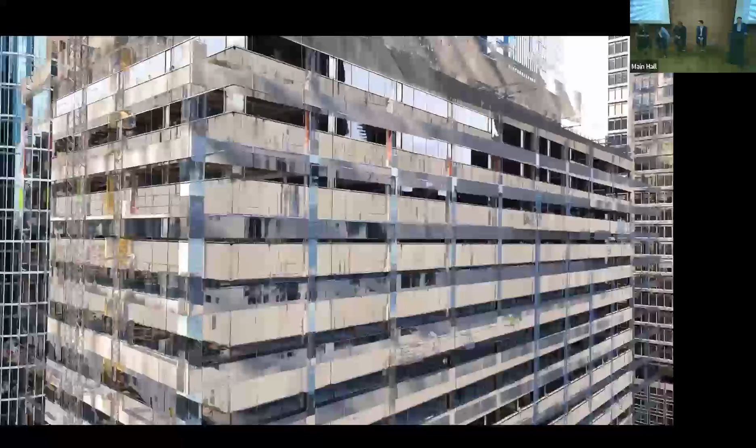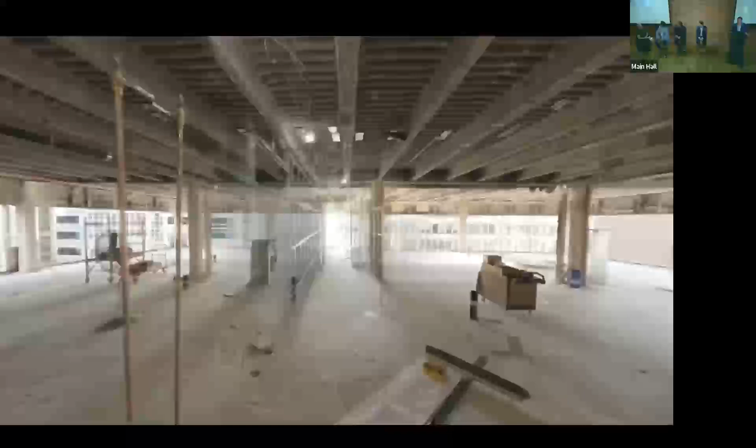So these are all views. Here we are in the lobby. Up on typical floors as it's getting framed out and drywalled through the course of construction.

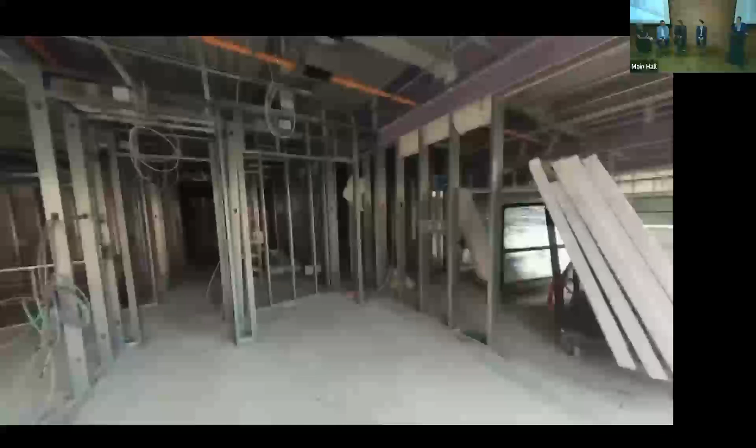There was some audio with this, I don't know what happened to it before. Yeah, the audio's not working. There was music behind this. It's not as good without the audio, but all right.

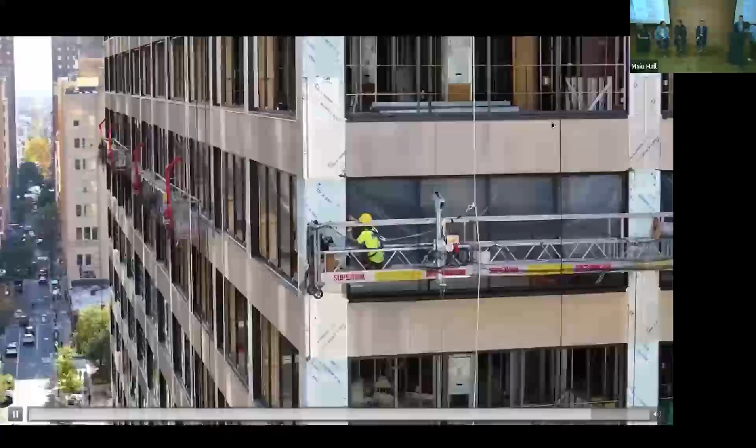Shout out to Elevated Angles who produced that content. They do a lot of great work for us from a drone footage and time lapse capture standpoint, so they deserve some credit there. Elevated Angles.

So going through the contents, we want to take you through this presentation in 4 separate parts, and we wanted to be holistic about how we approach it.

So we're going to first talk— I'm getting an echo. Closer to the mic. Is that better?

Okay, so we want to take you through the building in 4 parts. We're going to start with the building history and context. Then we're going to talk about the exterior evolution of the building over the last 68 years, and then get into the planning and design, including interior design, MEP systems, and certain decisions made with the floor plans and unit layouts.

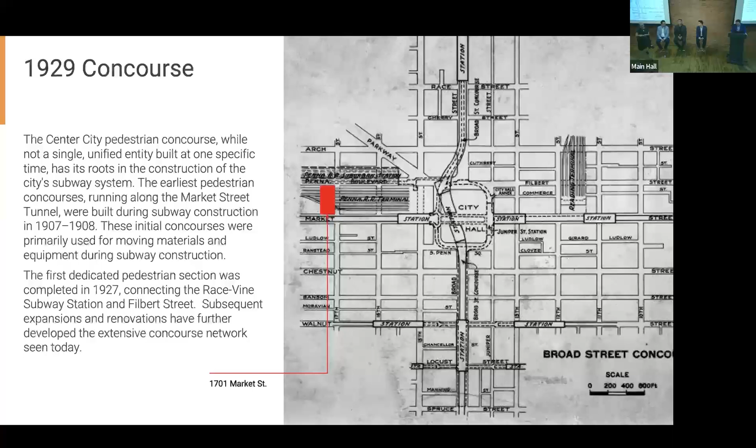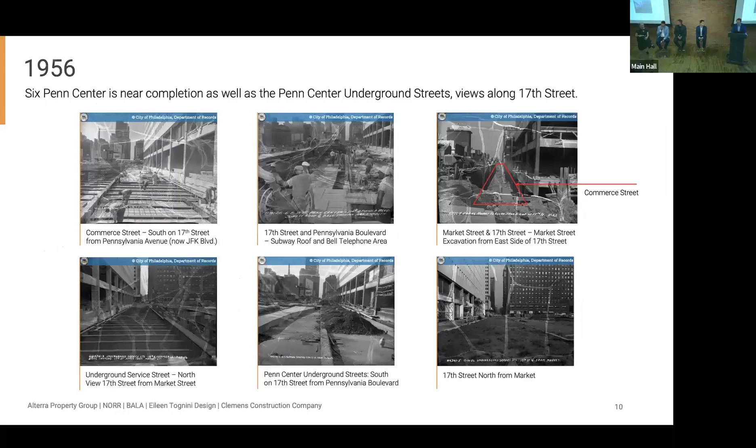Fast forward to 1956, this is Six Penn Center nearing completion, as well as the underground street that's part of Penn Center. So what you see in the upper right image is Commerce Street, which has a major advantage to this project. It basically has an entry point on 19th Street, goes underground, under 18th Street, and then under Market, where it eventually dead ends at 16th Street.

There's a loading dock under 17th that became critical for construction operations. And maybe you could touch a little bit on that, Brett, on how advantageous it was to have that loading dock there, which is owned by the city but has been great from a staging point of view, loading and unloading.

Thank you. Yes, any project Center City, you've got your logistics challenges, and it is very convenient that we had a loading dock right there off the concourse. It was a shared loading dock, so we had some challenges with that, but it was very helpful in the execution of the work. Unfortunately, that loading dock only led to one small freight elevator, so at the end of the day it wasn't enough. We had to put a man and material hoist on JFK in order to supplement that for getting the job done on time.

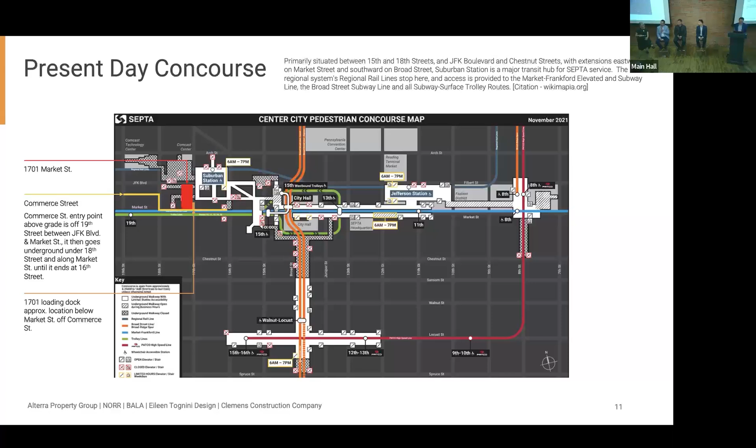This is just a diagram showing Commerce Street. I think maybe you could talk a little bit, Mark, about now that we have about 25 tenants in the building, how advantageous this has been for move-ins and move-outs. My understanding is this is what they're using, right?

Yeah, no, that's exactly right. And I'll be first to tell you, I didn't even know that street existed before the project started. Seriously, do yourself a favor and go down 19th Street at one point in time, and you'll see off to the left-hand side there's Commerce Street, and sure enough, it goes down. And I've worked in Philadelphia my entire career, and I never knew this street existed prior to this project.

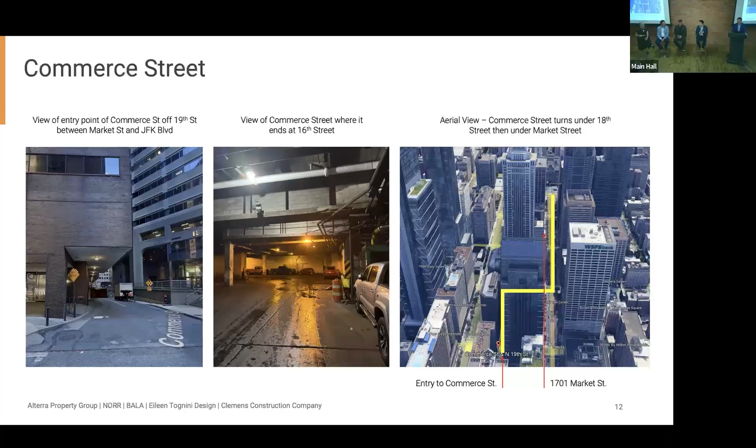But what that really allows, guys, is a very seamless transit and move-in process from property management and lease up. You don't even know tenants are moving in because they're not in front of the building, not obscuring any of the building elevations or main entry points. So it's really been a great amenity, an embedded amenity to the building.

Here's a photo I found in the Department of Records, which is pretty neat, that shows in red Commerce Street under construction, and to the right is 1701 Market. This is around 1956. It would open up a year later.

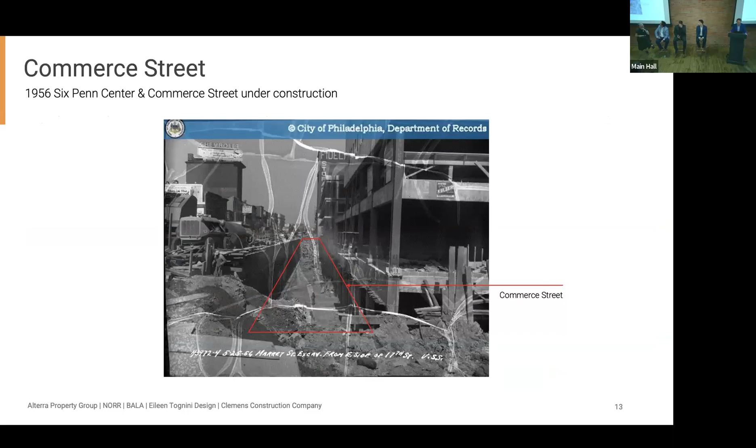To the south is Commerce Street. In the bottom right-hand corner, we have the loading dock under 17th Street. And then we have a pedestrian concourse in Suburban Station that basically cuts right through the building.

Between the pedestrian concourse and Commerce Street is our Concourse 2, C2 level, where we have several amenities and MEP rooms. It's quite a nice space with very high ceilings, which allowed us to do things like a basketball half court and a pickleball court. We have plenty of ceiling height.

And then to the north of the pedestrian concourse is what would be retail space. Where the corner bakery is, that would be exclusively for use of the tenant. And I think in conversations with tenants, potential tenants, that's probably been an asset.

Right now, leading off of C2 is actually the temporary construction office, which is probably one of the nicer construction offices you guys had. Meaning they're not occupying a unit or apartment, which typically takes place where they don't have a detached trailer on the sidewalk necessitating a long sidewalk closure permit. So it is very unique.

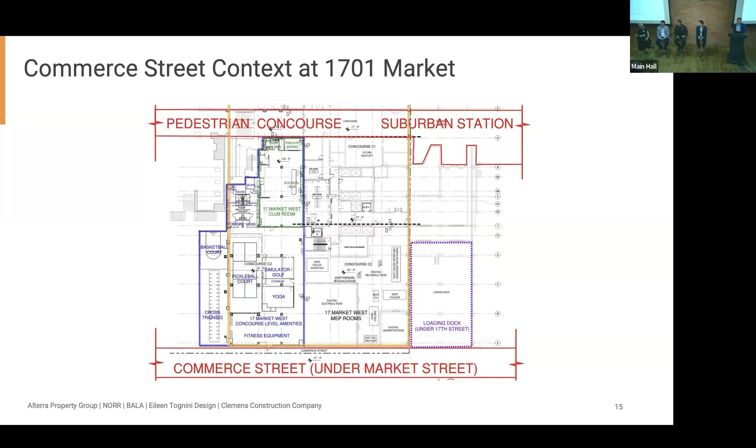So I think next, the thing that's most noticeable to everybody as you walk past the building is the exterior evolution, and everybody remembers what it looked like before and what it looks like now. There are a lot of advantages to replacing the windows. It was both a practical and key feature in attracting tenants.

Mark and his team did a lot of research on this, particularly attracting tenants, and the operability of the windows being paramount for well-being and tenant comfort, bringing fresh air into every room. So maybe you could touch on that, Mark, why full height windows were so important and having that operability.

For this building to be competitive with new product being introduced in the marketplace, it was paramount that we have floor to ceiling height windows. When we were walking through the space, it was originally ribbon windows, and there just wasn't enough natural light or access to natural light and air.

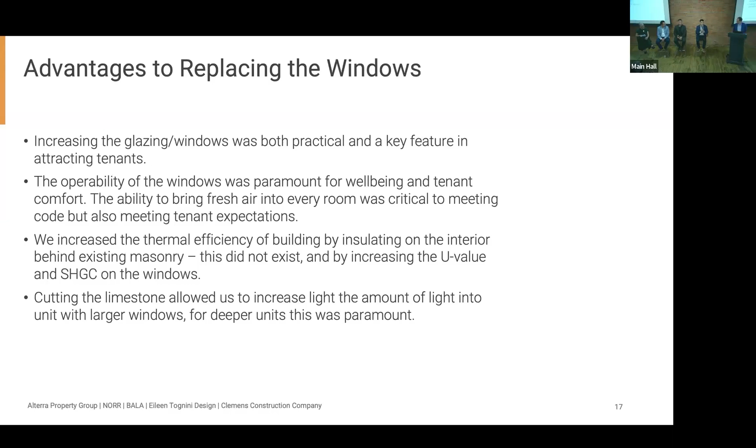Interestingly, on the 18th floor, which was the boardroom level of Morgan Lewis, they had actually cut down the windowsill height at one point in time further before they introduced the ribbon height. That kind of compelled and inspired us to take it one step further and cut it down as low as possible to the existing deck elevation to achieve a rough opening that would accommodate floor to ceiling height windows.

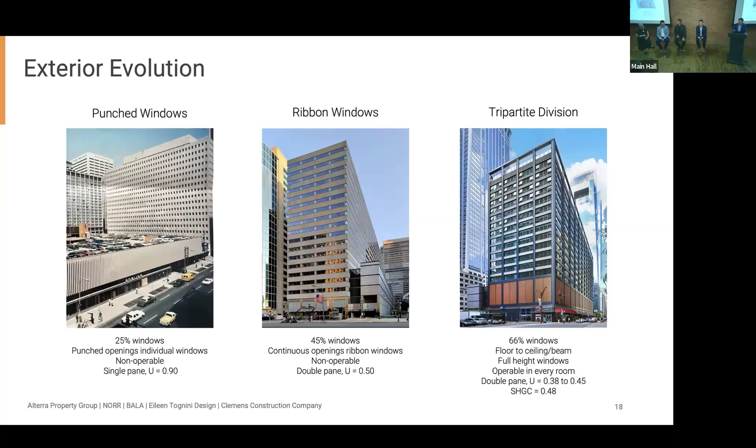One of the things we used early on to proportion the building aesthetically was a tripartite approach, a very traditional way to design an element or a whole building. The building had a very horizontal expression with the ribbon windows, but in conversations with Mark and his team, we wanted a more vertical expression. Beyond that, we wanted a simple proportioning device to give the building a distinct base, middle, and top, to speak to the different functional programs of the building.

At the bottom we have retail, above that the parking garage levels, and then a series of units from the 6th floor to the 18th floor. At the top we created what we call the sky frame. I'll get more into the details on that, but this approach of accenting the verticality of the building, since it's a high rise, and doing the tripartite design really improved the look of the building.

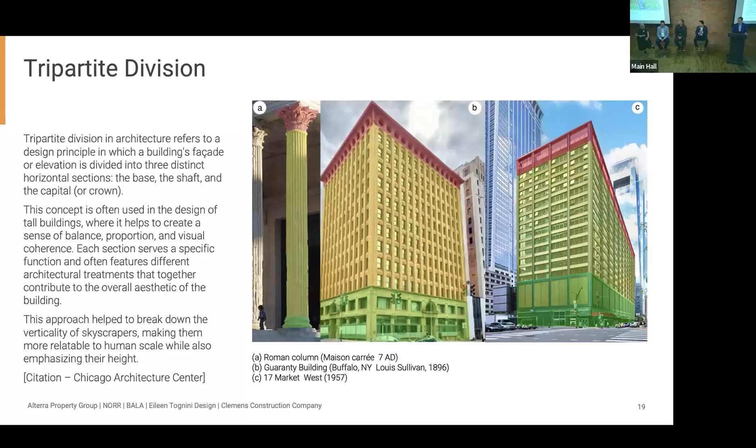Agree with everything Adam just said. Because we're the shortest building in that immediate area, we really wanted to make the building feel a little higher and accentuate the vertical components. The NORR team, led by Adam, did a great job introducing vertical ACM column enclosures. Together with the depth the new windows created, it really does a great job of luring the eye from pedestrian level all the way up to the top of the sky frame, which is the top of the tripartite design approach.

One of the things we wanted to do was create the perception of an infinity edge on the pool, using the advantage of being lower and far away - it hasn't been finished yet, but the idea is that as a tenant walks out, they'll have a wow factor seeing the water spill over the edge. We're also creating a cedarwood canopy above, right as you enter, with ivy to create a greening, welcoming effect that brings a human scale to the roof deck.

Beyond that, we were trying to create little rooms and pergolas. Maybe Eileen, you could speak to the rooms, furnishings, and different spaces we were trying to create up there.

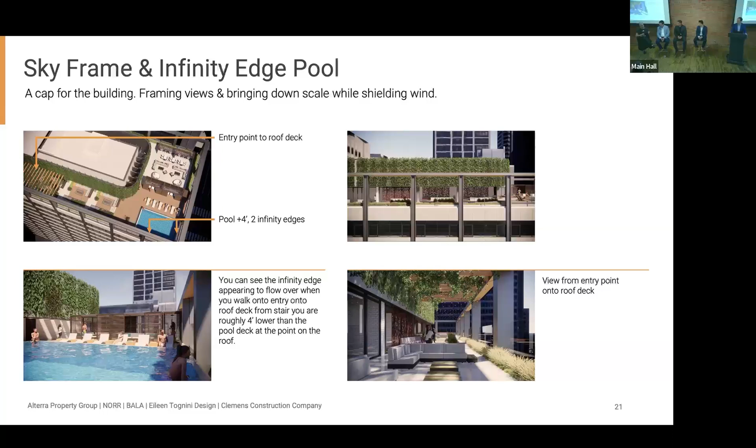Here's a view from about 3 weeks ago. There's been significant progress, and now there's a bunch of pedestals and pavers up there, but it starts to give you an idea and sense of the space. To the right in the photo with the tarp is where the pool is - the pavers are going to be basically at that level. You can start to see that the sky frame frames views out.

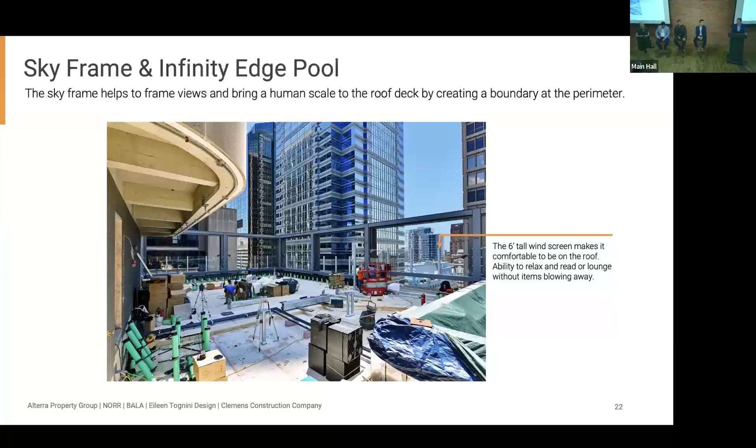One of the things we wanted on the sky frame is we created a 6-foot tall glass windscreen around the entire perimeter, and we wanted it to be 6 feet from the top of that windscreen to the underside of the ACM that wraps that beam, to create a 1-to-1 proportion. We thought that was really appropriate. At the pool in particular, and other places as you walk further away where you have lower elevations, that height is a little more between the top of the windscreen and bottom of the sky frame.

And these are some views of the sky frame at night. We had a lighting consultant, Kim, who's not here, but she was critical in helping us uplight this canopy of the sky frame. We can change the color of the LEDs. The whole thing's illuminated. I think it creates a really nice effect at night, not just for the city, for people walking along looking up at the building, but also for tenants that are up there. Anything you guys would like to add to that?

No, that's right. It creates some visual interest, not only for occupants of the roof deck, but also from the pedestrian level. You can see a glow, a warm glow, and we're also able to be consistent with some other trending themes.

Go birds, right? Yeah. Red October, things like that. A lot of green.

So for anybody out there asking themselves, what do I need to look for in a conversion? I have a building, it might be an office building, it might be something else. What are the key targets for a conversion? And how do I make that decision that a building's prime for conversion? One of the things I got, the first bullet point, is from Leo at Alterra Property Group. He was interviewed by the New York Times a while back, about a year and a half ago, I think. And he said, you start with the building, you start with the geometry of the building. And I thought, that's right. The geometry of the building is really critical. What he means by that is the depth of the floor plate.

Ideally, from your living spaces where you spend most of your time, I'm talking about your living rooms, your bedrooms, your kitchen space, you want to be within 30 feet of a window. Any more depth than that, and it starts to get hard for the light to penetrate that space unless you have really high ceilings. The other big thing is operable windows for fresh air. That's something we all desire in our spaces, that we can control the climate and bring in a nice breeze. The size of the windows for sunlight, right? If it has small windows, is it possible to increase the size of those windows?

One of the things that Mark and I talked about was the existing stair locations. You want to avoid dead end corridors that exceed 50 feet. 50 feet is the maximum you can do at the end of a corridor. So we were able to avoid that here. Our corridor is about 49 feet. We did that by extending 2-hour rated corridors off the existing stair towers. That saves a lot of money and increases your efficiency.

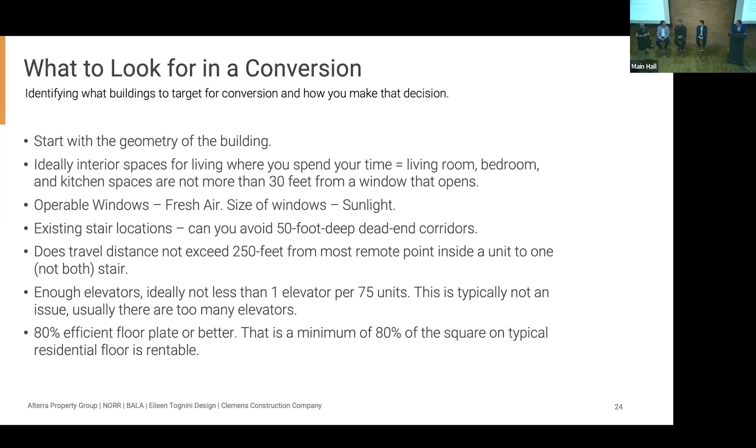So advantages of the conversion at 1701 Market. The depth of the floor plate, keeping in mind what I just brought up, is 87 feet 4 inches. So it's not too deep. Your unit average is 41 feet deep, which means within 30 feet of the unit, you can have all your living space. So we pretty much located the washer and dryer, the bathroom, the closet or walk-in closet, all along the corridor. So that space doesn't necessarily need natural light. That's why we took that approach.

The centrally located elevator bank was really convenient. Where the elevator bank was, we were able to make it work, with short wait times due to the quantity of elevators. Tenants don't want to wait a long time for an elevator, so we have 5 elevators that serve a typical residential floor, which is really good for the number of units.

We were able to achieve 9-foot drop ceilings throughout, which was a big point for Alterra and Mark, and credit to the Clemens team for making that happen because it was pretty challenging. I don't know if there's anything you want to address there, Brett.

We knew what they wanted, they told us 10 times. So we went through each floor, made it happen, and figured out how to make it happen. It was definitely a challenge, but it's expected. There were quite a few other things that were a little bit more challenging on this project, but we'll get into that a little bit later.

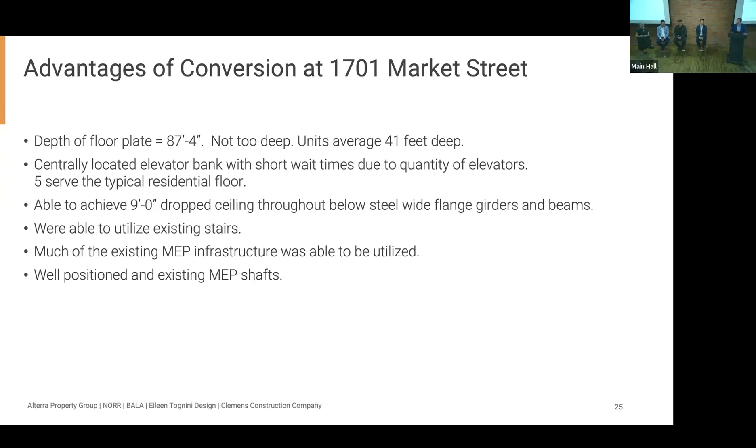Much of the MEP infrastructure is able to be utilized, and Jim has a whole series of bullet points and slides where he'll address this in a minute. We were well-positioned with existing MEP shafts, meaning we didn't have any existing MEP shafts that were at the windows or somewhere where we would naturally want to locate a unit.

This is a floor plate depth diagram, looking at a couple projects in Philadelphia: the tower at Henry, which is 41.2, 17 Market West, which is 87, and the Civic, that's 105. Typically on ground up new construction, we're targeting anywhere from 60 to 65 feet of floor plate depth, so we're more than that. Typically you want to be 28 to 30 feet deep on your unit, with 5-foot corridors.

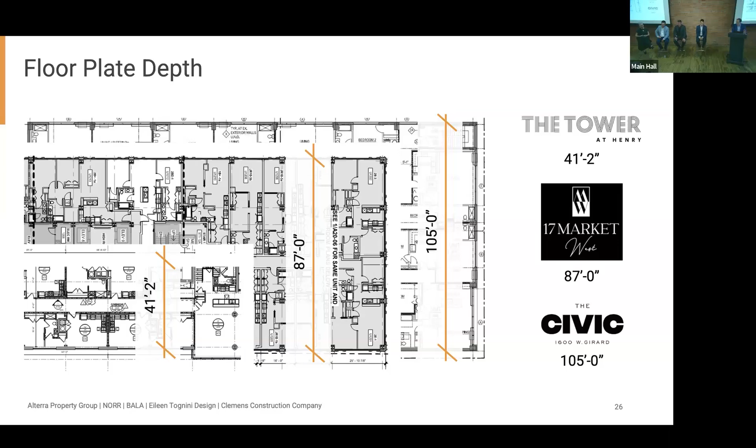If in the ideal world, if you were not designing on the ideal huge site -- so I think Mark mentioned this earlier, the actual floor plate itself, what are we at? Something like 22,500 square feet per floor. It's 259 feet by 87 foot 4. So we ended up at an 83.6% efficiency, which is pretty darn good.

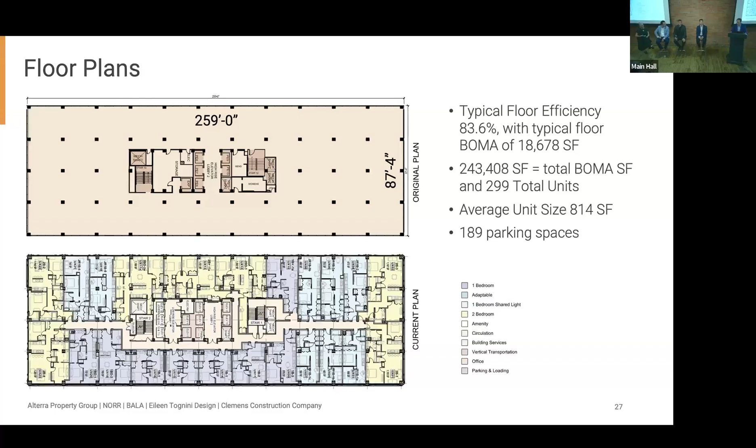With 299 units, the average unit size -- this is adding all the units, the total BOMA square footage together and dividing it by 299 -- comes to 814 square feet. And the building has 189 parking spaces as well.

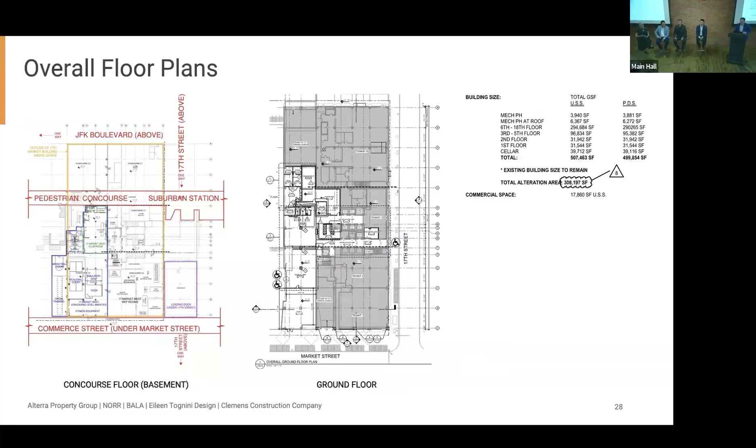For the overall floor plans, this is just giving everybody some context: the basement or the concourse, which we've already talked about, and the ground floor. The 2nd through 5th floor is parking garage. That's where we have 189 spots. There is some EV parking.

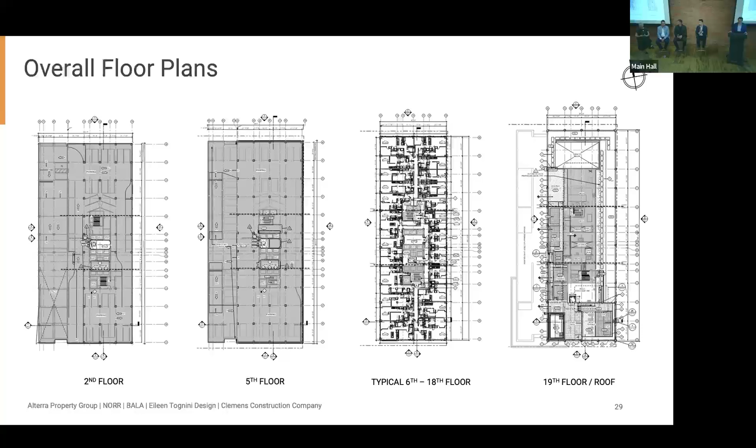Maybe Mark, you could talk a little bit about having 189 parking spaces for 299 units and how that's been advantageous to attracting tenants. Sure -- so despite this being a TOD, right over top of suburban station, with the targeted demographic, and particularly in a post-pandemic world, we are seeing a higher demand for having car spaces or parking spaces for tenants to have cars. We have seen that trend grow since the pandemic, and so having 190 or so parking spaces really was an embedded amenity that was a differentiator within the marketplace.

So I think we're just going to take you through a couple typical unit plans, and as we go through these, I'll try to ask the panel to chime in with comments that you have on these unit plans.

We centrally located that to avoid ductwork. Maybe you could address that, Jim, on how we located that in the unit and why that didn't require ductwork, which got us to something that's quite efficient but got good distribution throughout the unit for conditioning. Absolutely -- I think the biggest driver of that was reutilizing the existing distribution systems, more so the pathways of the building. Built as an office, everything was centralized and kind of spread out like a spider. So what we did was utilize that distribution with the new layout and new equipment, locating that air handler close to the corridor where we could tap off of piping to give these guys the ability to get the ceilings that they wanted -- that was critical.

And I think what you don't see in a lot of the market, which I commend Alterra for doing, is -- it used to be, many years ago, you were seeing chilled water systems in apartments. That went away.

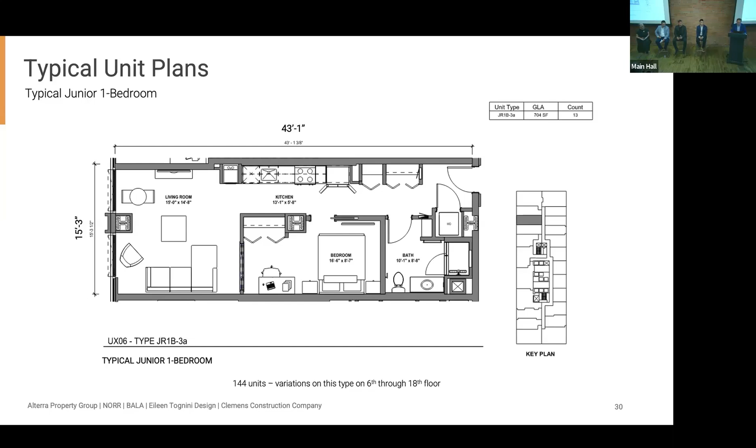In model units we try and take advantage of every open space and show all the possibilities. That's from a marketing standpoint, from a design standpoint, that's our obligation. One of the things I liked about these units is they typically allowed a work-from-home desk right next to the large plantation shutters, so you could open them and get natural light and a view out, turn your head and see the weather while working from home, rather than burying that desk closer to the corridor.

I don't know if there's anything you want to address about this unit. Anyone?

Yeah, look, I think just maybe take a step back. Originally when we looked at this there was 325 units—that's correct, right? Correct. And that was part of Adam's mastermind. I think he's amongst the best in the business for this type of stuff, and that worked from an underwriting standpoint, and quite frankly arguably better than what we ended up building. The end product unit count is 299, but we thought there was a growing demand for larger unit formats, and so far that has played out to be quite the case. 2-bedroom units have been the first to be leased, and actually have been leasing at a faster pace than even the smaller format units, the junior 1-bedrooms. So I think that worked pretty well, and to Adam, it was a great decision to go with more 2-bedrooms.

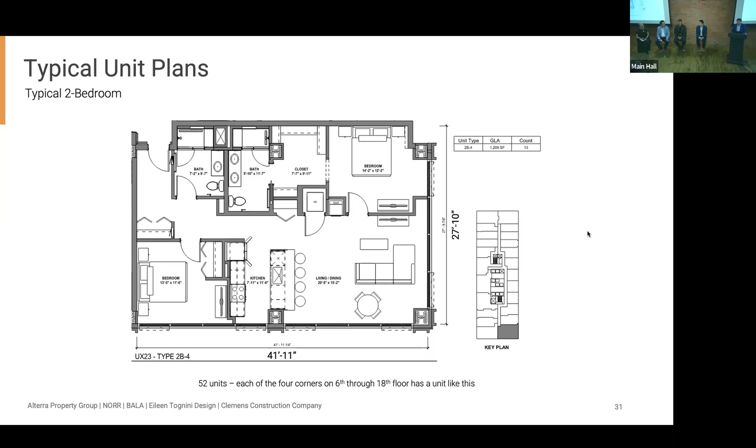I would add to that, Adam. I think these unique units show your guys' skill set in connecting with the egress and the elevator. There's a lot of glossing over, but everybody in here, if you've worked on a project like this on the multifamily side, knows that was very complicated.

There was a lot of iterations, went back and forth, and did a great job making it functional at the end of the day.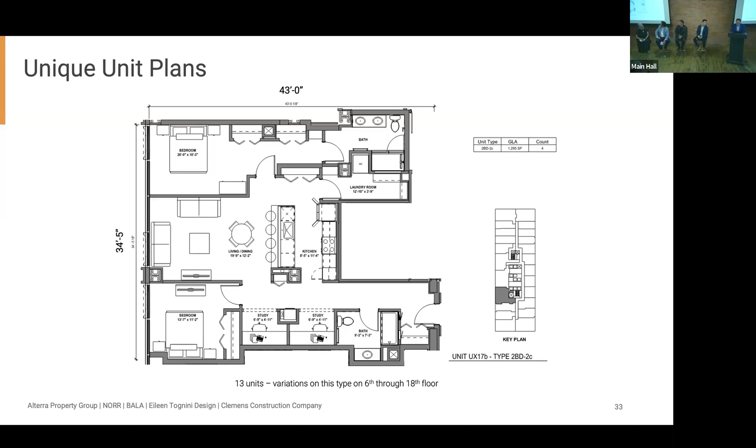We worked closely with Alterra to decide what these little rooms should be. Sometimes it was a study room because it didn't make sense to make it the laundry room. Here, getting the double bowl vanity is huge in a bathroom of this size, and to have a laundry room in your unit is pretty spectacular.

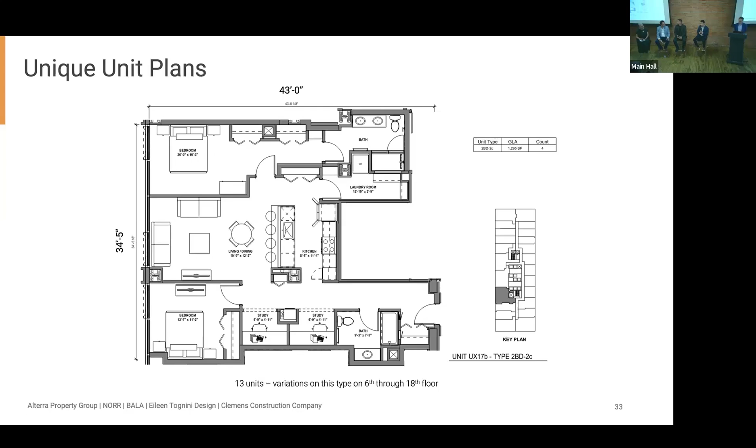In the context of the competition, it's very rare to have a walk-in laundry room. That's right. We were able to use every nook and cranny of these units and got really creative with every single square inch, to Eileen's credit as well. In terms of the model units and the overall interior design spirit, that's part of the game when it comes to conversions - how can you thoughtfully, creatively, and innovatively maximize the utility of these spaces? So far, I think the team's done an excellent job.

So there's some bullet points here on the advantages of the existing MEP and FP infrastructure. I'm going to pass it over to Jim - he put together some bullet points here, which he's touched on some of these already, but hoping you could maybe further elaborate on some of these.

Sure. I think the most important part of this project is Alterra's process, involving all of the design team and all of the contractors, even in acquisition of the building. When you're doing an OTR, getting an understanding of the building itself as you're working through that financial process, and how iterative that is, carries through the entire design process.

Using the design-build model, I think, is what really makes a project like this go. Through that, we're able to figure out, okay, they've done good maintenance on the chilled water system - they have newer chillers, so we were able to capture and reuse those systems. The cooling tower, we were able to reuse that too. That really drives down the initial cost of construction in a project of this nature.

It's always the big things that nobody wants to worry about that are the most important things when you're in the building - you want your power on, you want your heating and cooling on, and you want your domestic water functioning properly. So reusing things like the bus duct and the distribution there - it sounds like a simple yes or no to reuse it, but it took a lot of work with contractors, testing, and verifying, seeing if we could get parts.

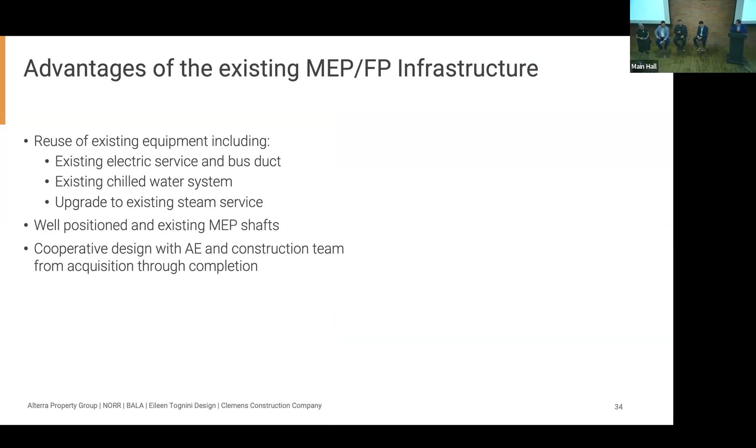One of the things that's kind of unique that Alterra is doing is we're able to reutilize the steam system. A lot of people are going off of steam, but we came up with a pretty good play on generating domestic hot water with a steam service that's already there and reutilizing that.

A lot of this plays into sustainability. What I see truly as sustainability is recapturing what's already there, getting the rest of the useful life out of it, instead of replacing it with something brand new that's maybe a little bit more efficient - really using what we have and capturing that. So here we have a little diagram that explains the system with some bullet points around it.

Jim, I know you've touched on this before, and you did just touch on it, but anything you want to add here about the 2-pipe system?

Sure. Essentially, because it was a chilled water building for office before, we were able to give them now a residential chilled water facility. So you've got your fan coil in your apartment, and for cooling we're using the chilled water, which gives us really good humidity control, along with all the standard cooling. Then we have electric resistance heat on each fan coil unit to provide the electric heat - again, getting off of our carbon consumption, right? We're using direct electric resistance heat.

A lot of our sister cities, New York, Boston, they're all going full electric on the building. So it really is marketable. Ever since COVID, everybody's paying attention to what's inside their space when they're buying apartments. So I think a lot of these things that were done are really adding value for people who are paying attention to what they're buying.

The other real elegant thing about this approach is that it minimizes the amount of duct work needed to condition the units. And duct work in my world is bad. We always try to cut down on duct work. It's inefficient, it's expensive to build, and it also impacts the ceiling heights we were trying to hold at 9 foot clear. So we really had a minimal amount of duct in this project, which I thought was a testament to this team and the collaboration that went into it.

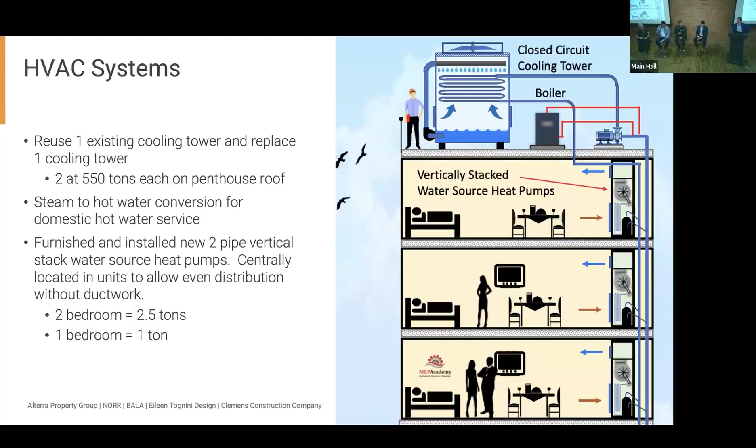So one of the things I want to talk about too is the exhaust and ventilation. This is pretty common with high rises and even low rise buildings where you're trying to avoid having a bunch of louvers on the facade: a subduct system. Essentially it's a central duct that's in a bathroom, and then a pipe from within the bathroom that goes up to 22 inches inside that larger duct. That's considered subducting. Normally that goes straight to the roof, and there's a fan sitting on top of it, so you don't have to worry about where the subduct goes.

But on this one, we really challenged Jim because we decided to put a pool, a dog run, a lounge, and pergolas. So Jim and his team came up with some really creative solutions on how to horizontally transfer that subduct below the level of the roof. He deserves a lot of credit for making the roof deck what it is aesthetically, because of his solution here.

First and foremost, what's key here about the subduct system is that's how we get our fire separation. This is a real cost-efficient way of doing this by doing a subducted system—we do not have to do fire smoke dampers. That's typically, as we're looking at the start of the project, how do we get the most cost-efficient side of the ventilation and exhaust system. So going by subduct removes the need for fire smoke dampers, which costs a lot of money.

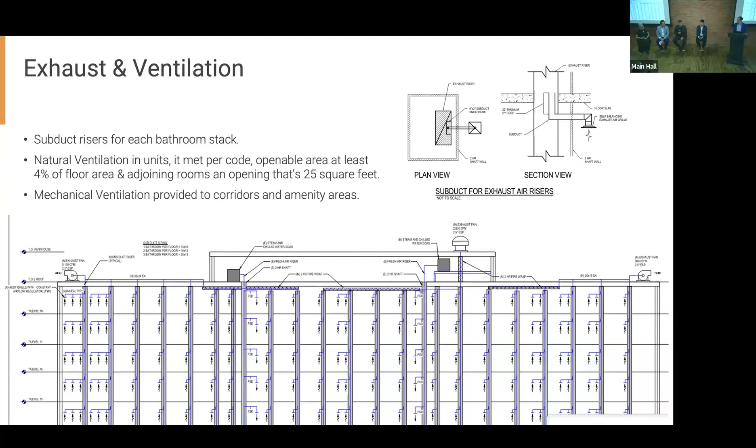So the interior design vision—I'll pass this over to you, Eileen.

Well, that was a great segue into this, because I do want to acknowledge that when the ink dried is really when the entire team was assembled, literally from day one, including the interior design team. That is something I don't take for granted, but I want to acknowledge Alterra's commitment to having the interiors component there from day one. It's incredibly important for our team to understand the process, the challenges, the vision, the owner's vision, the capabilities and abilities of the project and building—becoming intimate with the building, feeling it, seeing it, understanding it and its environs. There will always be surprises, there will always be challenges, there will always be budget constraints. And if you're not there from day one, there are opportunities that are missed, and also expensive mistakes can be made. So that's an acknowledgement—if anybody's assembling a team for any project, I want to mention the success hinges on that.

Just to talk about vision—the very early conversations with Alterra were very much that this building was to have a sense of, obviously, everybody knew this was a very important building. It was creating a new neighborhood, a new living situation in a corridor that was not typically residential. And the vision was definitely that of wellness. Those were the early words we heard. When you step back and think about what wellness means—it could be a noun or a verb—but it certainly came out first with wanting certain amenity spaces that had a certain programming, and you'll see a bit more about that. But that's a very concrete definition.

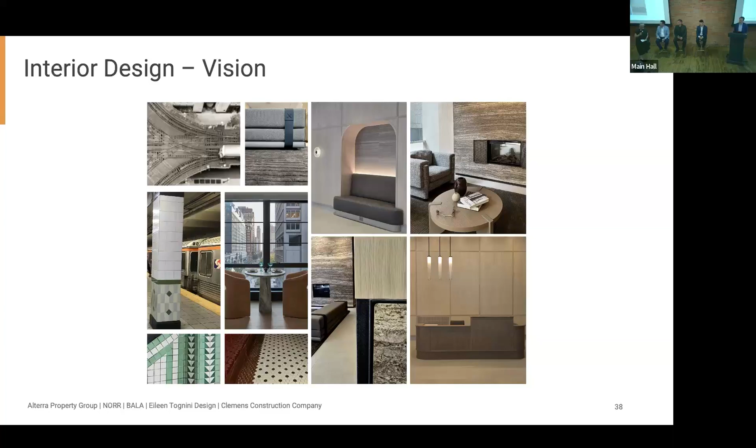So that's a little bit of the broad gestures or broad definitions of the vision itself. So yeah, let me see what that next slide is. Let me talk to that one. There we go. And there's our model unit.

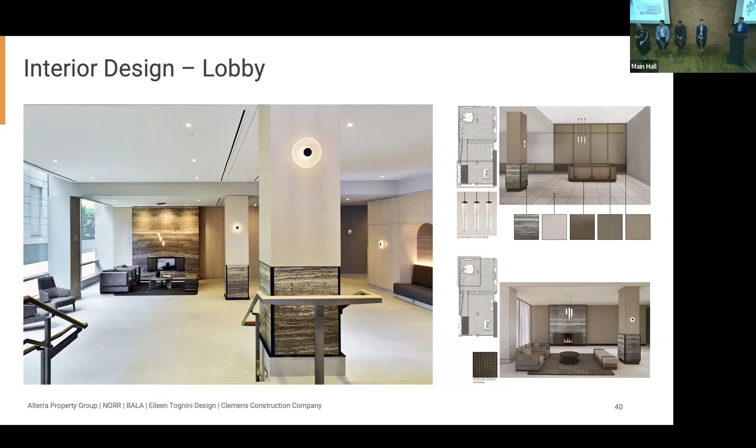I don't know if I have anything else. We could go down to the concourse. Yeah, sure, let's go to the concourse.

The concourse is a floor and a half below ground. That is a pretty expansive space with the fitness center, which is a pretty robust wellness program that has a half basketball court - I don't want to take Mark's... No, go for it, you're doing great. So a half basketball court and a pickleball court, and the bathrooms have cold plunges and saunas. There's a CrossFit area, fitness equipment, a yoga room, a golf simulator, and basically a community space. The club room - that's wellness on steroids.

The wellness, it's not just a brand, right? This gives people a very tangible, practical way to practice wellness, anywhere from the saunas to the cold plunges to the CrossFit, the yoga room, the Nautilus area, as well as social wellness and well-being.

So we'll go back to the club room on the well-being side. I heard a study today about how, particularly post-COVID and in the time of social media, we really do struggle with loneliness. So our spaces are all about how do you create a place where people can be together and congregate in different ways - together, singularly, to work, to play, et cetera. Certainly kudos to the property management teams that also make that happen.

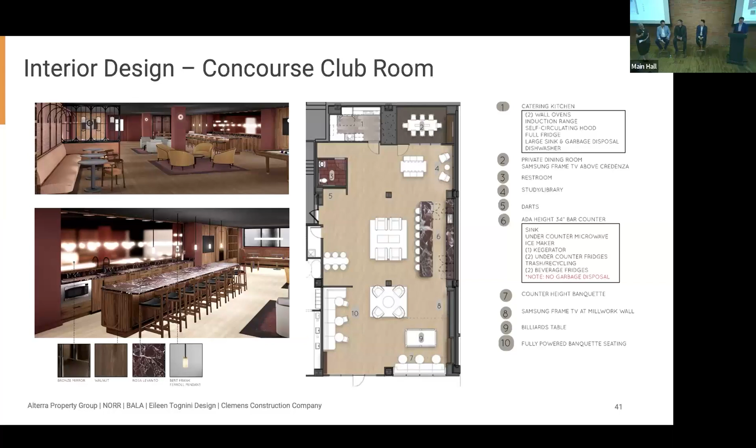Again, there are ways to interact with your fellow tenants. There's also a private dining room, which can be used as a small conference room or a private party. There is a bar as well, and a pool table in that area. We're nearing completion on that in the next short time period.

Thank you. Yeah, so we're gonna jump. Okay, oh, I forgot we had these fitness center renderings. So yeah, oh this really kind of...

The space was a bus terminal back a few decades ago, and they literally would drive buses into the space for maintenance and washing. So we had tremendous ceiling height, to the tune of 23 plus feet, and you don't find that too often. In fact, if you were to build this new out of the ground, you wouldn't, because you wouldn't be able to afford it. One great thing about these conversions is that you're able to capitalize off a space that you wouldn't ordinarily be able to build in new construction.

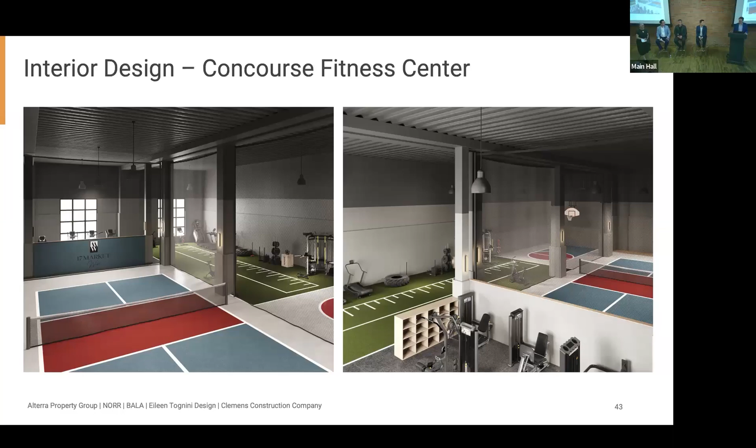So the last part is details, and this is really about the execution on the details. I think construction execution is critically important. Brett, I know you put some bullet points together here that you wanted to touch on.

We never could have pulled off such a challenging project without Alterra putting together such a great team of collaborators. As much as we could spend months planning out the execution of this project, there's always something that comes up, and this team was very accountable, everyone always had a sense of urgency to keep this project moving forward. So that's number one. Without a team that's working together, these projects always turn out unsuccessful.

The second most important thing is having trusted trade partners. A lot of people don't think about that, but having subcontractors that are willing to work with you and problem solve, not work against you, help you figure out and take the project apart and put it back together and figure out how you're going to execute it. When problems come up with procurement, logistics, sequencing, or price, they work with you towards a common goal to deliver our contract, our goal, and on time.

And lastly, for execution, it was really thinking through how we were going to sequence this work and execute the logistics. It's an urban job, and it was great to have the loading dock, but everything we were doing on the inside of the building, which was a gut and rebuild, wasn't that challenging—we do it all the time, and we're using a lot of existing equipment. That helps. But to cut down that limestone, remove the windows, do the podium, do the sky frame, and at the same time put the amenity on the roof with a pool, made it extremely challenging.

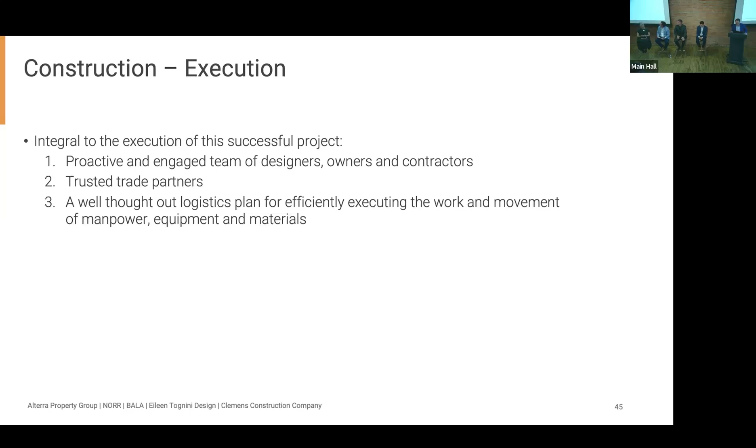Just a few last slides here to illustrate some of the points Brett was talking about, and to talk about one unforeseen condition. On the lucky 13th floor, there was a concrete vault that we didn't know about. When we got the plans and reviewed them from Kohn Pedersen Fox from 1999, we had every floor plan, but this vault wasn't shown. The way the project was sequenced didn't really allow us to go in and verify this condition because it was hidden behind a bunch of drywall walls, and there was no way for us to really know it was there.

As Mark and Brett just pointed out, it was very challenging, but we cut many openings in it, and Caleb, our structural engineer, was great in working with the team. And you can't tell—that's the big thing. If you were in the building today on the 13th floor and had one of these units, you wouldn't know it was there.

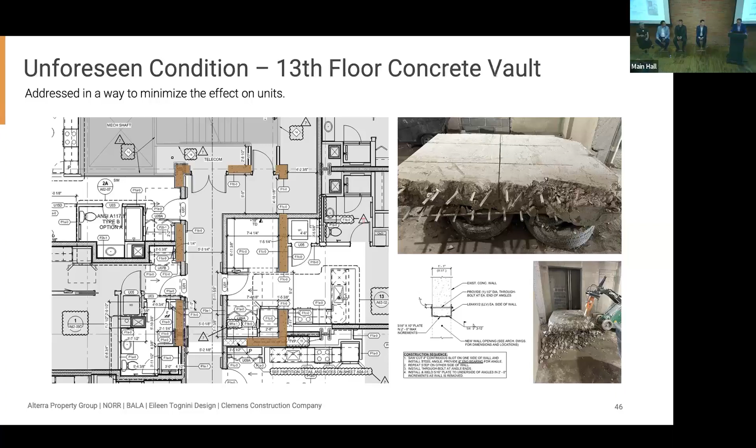So the limestone removal. Brett addressed this. One of the things we did, and Mark and his team were very involved with this, was coming up with a solution that was cost effective and constructible to reinforce the existing limestone that allowed us to saw cut the limestone from the interior.

So what we came up with was a C5 channel welded to the perimeter beam about 32 inches on center, and that C5 channel had a 3x3 angle clip on it. You'll see it in this photo where the limestone's cut and demolished. You can see there's a steel channel there with a clip that anchors to the back of the limestone.

We had to install that first before we cut the limestone because, as Mark mentioned, when they cut the sill of the windows in '99 and connected it all, they had a steel piece higher up at 36 inches above the floor that was holding the limestone in place. So it was a real challenge.

Anything you'd like to add, Brett? I think the survey took the longest to really figure out what we had, because every floor was different, and we came up with a solution that the curb is going to be about 5 inches. That way it could be consistent throughout.

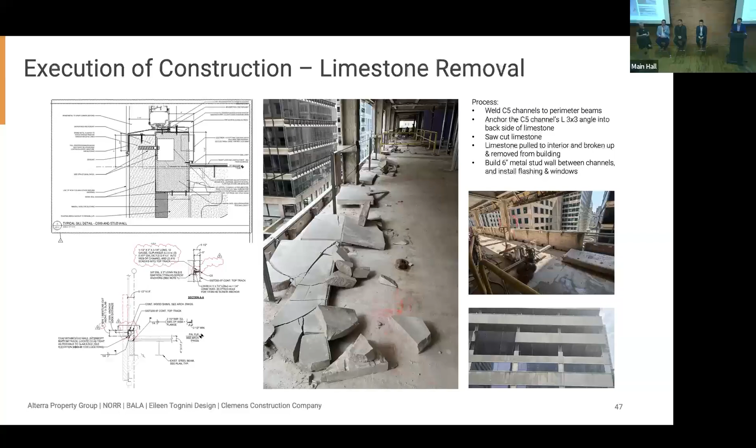And then we were trying to figure out how we're going to cut this thing safely over 17th Street, over JFK, over Market Street. We ended up coming up with this giant saw on a pallet jack. Here it is. By the time we were done figuring this out, we realized it needed 10 feet clearance. So as we were trying to lay out and frame and do rough-in on these floors, we had to really push to accelerate this limestone cutting safely.

We had 2 of these machines made, and they worked counterclockwise on the same floor, working their way up the building, and we would follow right behind them with framing out these openings to put the windows in, because the goal is by the time we get done our rough-in inspections, we want to throw rock on the floor, and we got to have it watertight. So it was a challenge.

Thank you. Those pictures don't even do it justice. There were countless hours in the planning and execution phase of that. Credit to the team, rolling up their sleeves, from BALA, the structural team, the architectural team, to the construction team. It really was an impressive feat. And I'm biased, but I think we did a much better job than they did in the 90s.

Yeah, I agree. I think we came up with more potential options to support the limestone than we did for some of the unit plans, just so you know how much thought went into this.

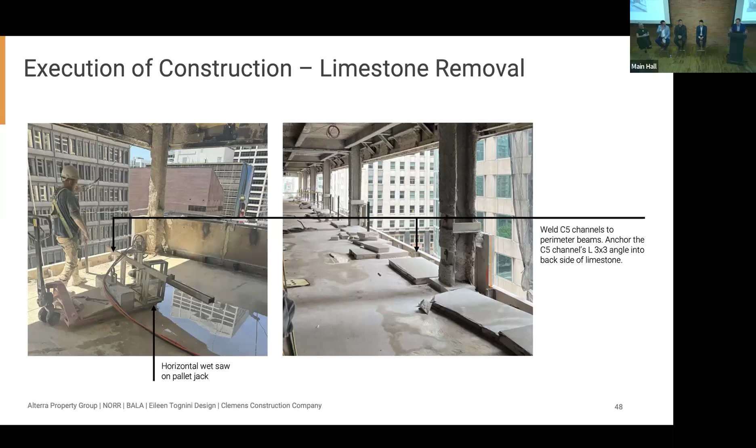So 5 options, the last thing's the sky frame. A lot of you might have been wondering how did you get these huge pieces of steel onto the roof? So I'm going to let Brett address the crane and the pick and what went into that, closing the street down.

I'll just talk about the roof in general. With putting the pool, we had to do a lot of steel reinforcing up on that roof deck. We had to safely peel back all the coping and the CMU to understand where exactly the steel was, so we could do a survey, fabricate some base plates and weld those base plates at every one of those, I believe 30 column locations around the perimeter, in advance of doing 2 weekend crane picks. We had 2 500-ton cranes sitting out in the street that you could only do on weekends.

We would set half of them on one weekend and just bolt them down in place, and then the following weekend we did the other half. Then we spent about 2 weeks after that welding them all in place so that we could then continue with the facade of the Skyframe.

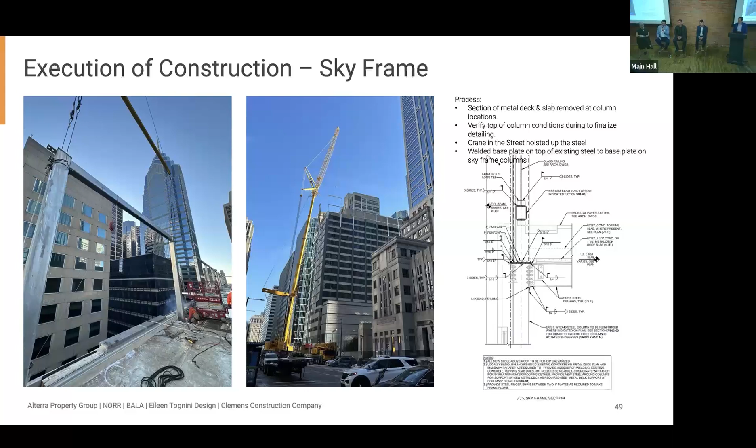Last slide before questions, I forgot about this one. So the garage perforated panels - we've gotten a lot of questions from people on this, and I think Mark, if anybody, deserves the most credit for it. And that's because Mark insisted on in-field mock-ups.

We originally thought that 30% openness on the panels would be sufficient, but that ended up proving to be too transparent - you could see too much of the limestone and windows behind. So then we went to 23%, still too much. So then we ended up at 10%, and I think that was the right choice.

And we actually delayed things a little bit schedule-wise to get this right. Maybe a little bit delayed - just a little, depends on who you ask. I think the success is counted in the number of text messages Mark and the Alterra team got from other friends and developers in the city saying, 'Man, that looks great.'

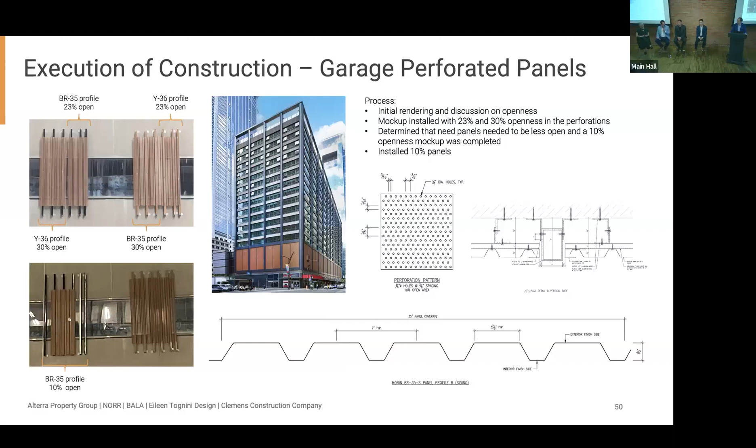I'm glad we got it right, because it does look great. But to do the podium, you needed the swings, and the longer the swings were on the building, the longer it held us up with completing the roof work. As you can see, the roof is complicated - installing a pool, doing all the pedestals, the pavers, everything else up there. So it took a little bit longer, but we got it right, we're getting it done.